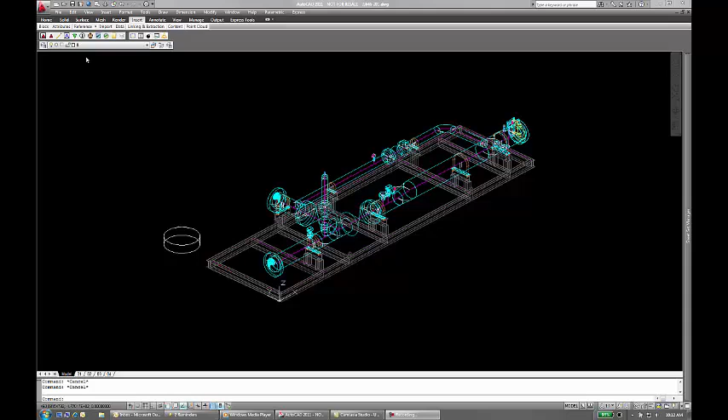So the pencil right here lets me pull up Mini Edge. It's asking me to select a piece of something, a beam in this case. I can go back and run it again and select pipe. So any CADWorx object, it pulls up the Edge Edit dialog.

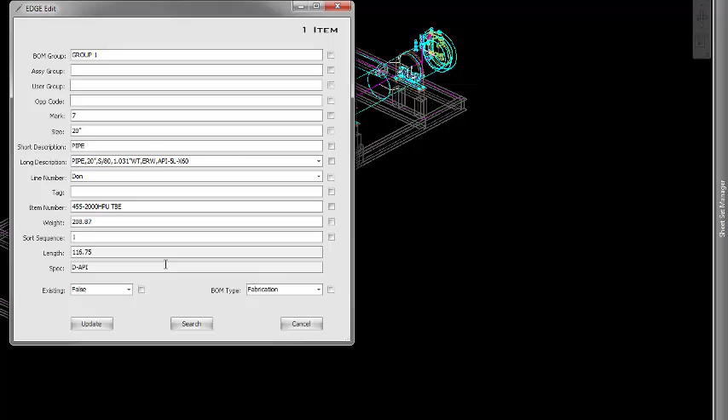So from here, you can make changes and update that part on a case-by-case basis. You can only edit one item at a time right now.

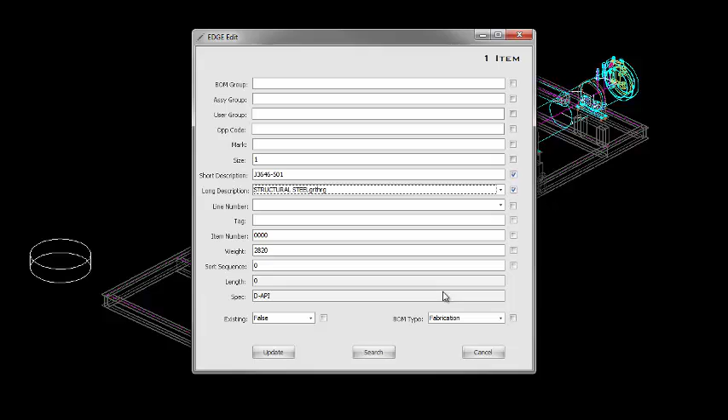But if I wanted to, I could go in and change this to something else. So update, one item updated. If I go back and select that item again, there's the change.

So as soon as I start typing in a field, notice it checks the box. So if I have a box checked, that field and only that field will be updated. You can edit not only steel objects but pipe objects as well.

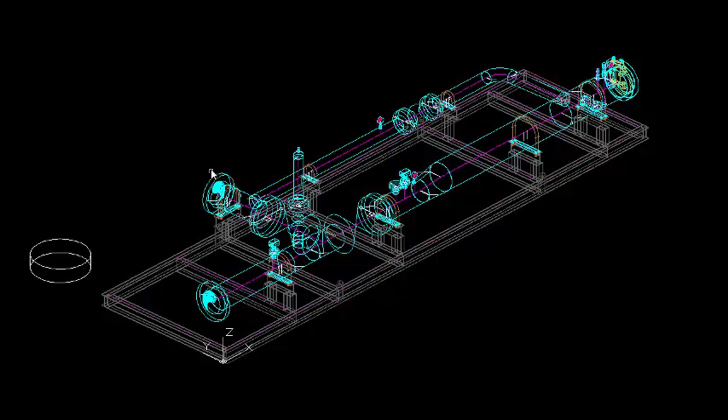Now another thing you can do from here is I can search. So this has an image part number in here for a flange, 16-inch, 600-pound raised-face weld neck flange. So if I click search, it pulls up the Edge search form. So flange, 16-inch, 600-pound, put 60, and raised-face weld neck, and search.

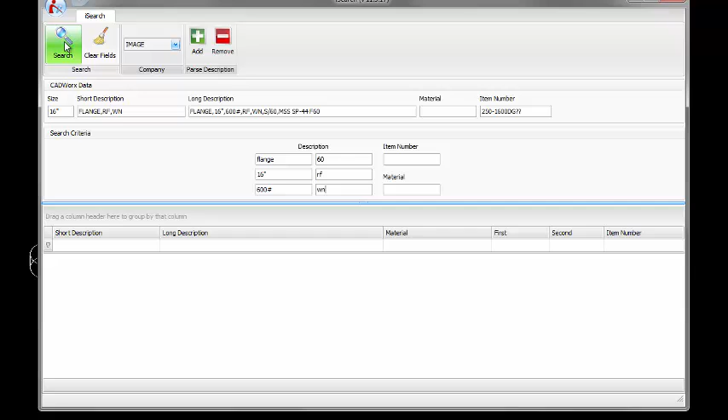This is a special material that wasn't listed. That's why it had 3 question marks in the description right here. But let's say we just wanted to use a standard SA105 flange. I can click that, double click, and it inserts.

You'll see it's updated the item number and it's checked it. It's also updated a short description and long description. I'm not sure why it didn't check that, but maybe a bug. We'll have to check on that.

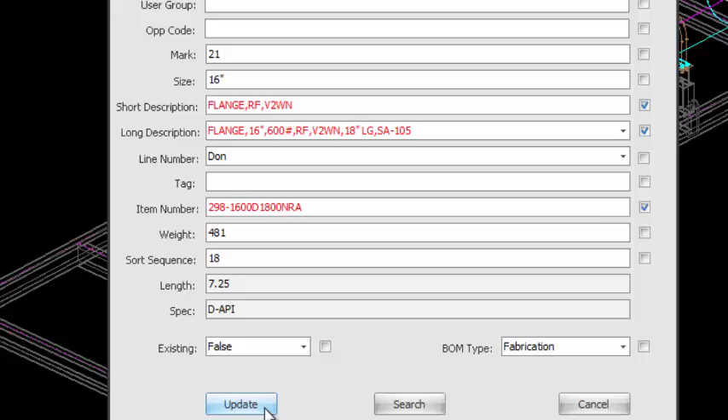Alright, so then I hit update. One item updated. So now if I go and run Mini Edge on that item again, you can see the changes are in there.

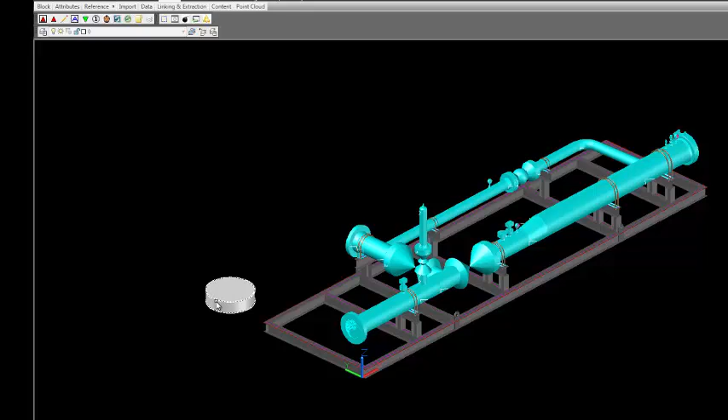One last thing, I've drawn in a shape here. This is a solid. If I go and select that solid, it says it's basically letting me generic attach to this item.

So I can notice that that was not a CADWorx entity. So if I want to, I can go ahead and generic attach to it. The center of gravity, if I want, I can use the geometric center of gravity. So it's going to look at the properties of this, find the geometric center of gravity of this item, and it's going to place the CG of this component at that point.

If I wanted to, I could say let me choose, and I could literally go and select a node or something. You need something probably to click on. But in most cases, probably use geometric center is what you want to do.

By default, it's going to go to put it on a spec called GNR for generic. If I wanted to, I could also select any of the specs that are set up for this job in the spec folder. And lastly, I can select piping, or I can select steel.

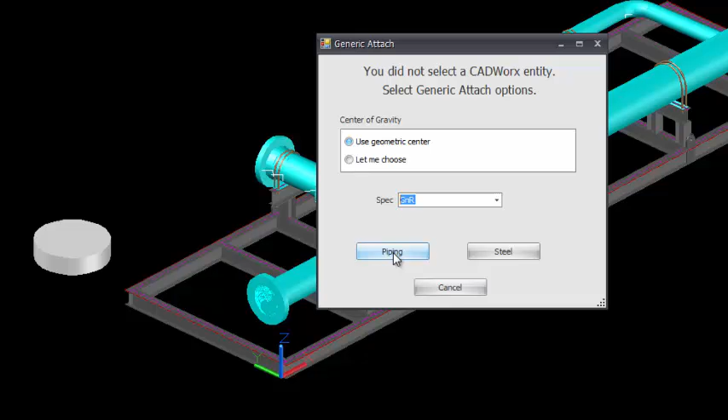If I select piping, it's going to basically put this in as a pipe component. So anything that is going to be unit of measure of each, you'll want to select piping. So at this point, it goes right to the form, and I can type information in.

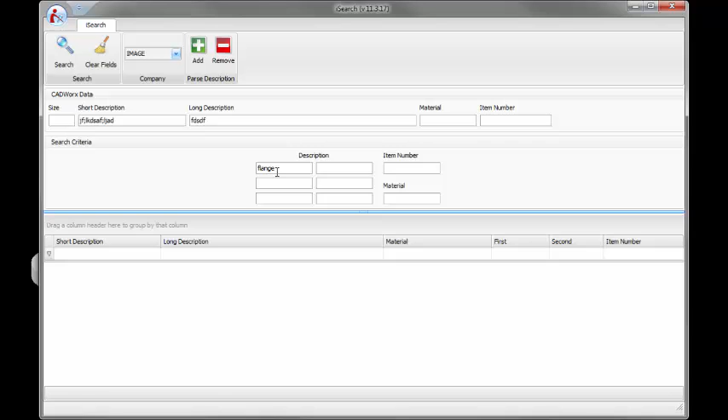Or at this point I could go and do a search, and let's just pick a flange just for the heck of it. Alright, so I'm going to call that a 1-inch flange. All of that data should be checked. Again, I'm going to have to look at that.

But now if I hit update, as far as CADWorx is concerned and as far as Edge is concerned, that object that we just drew in is now a CADWorx plant object with the description and part number that I searched for and inserted.

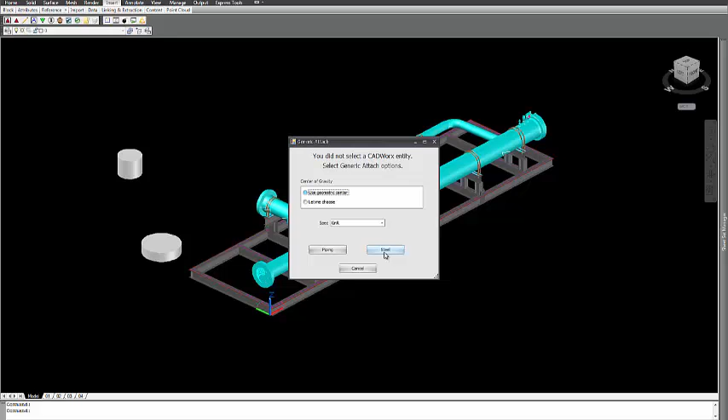Let's do that one more time, and in this case I'm going to do a search, and I'm going to use the geometric center again, and I'm going to pick steel, and in this case I'm not going to mess with anything, I'm just going to hit update.

But if I run edge, regular edge on it, not mini edge, you'll notice that I've got two items. I've got tagged only select, there we go. So I've got two items.

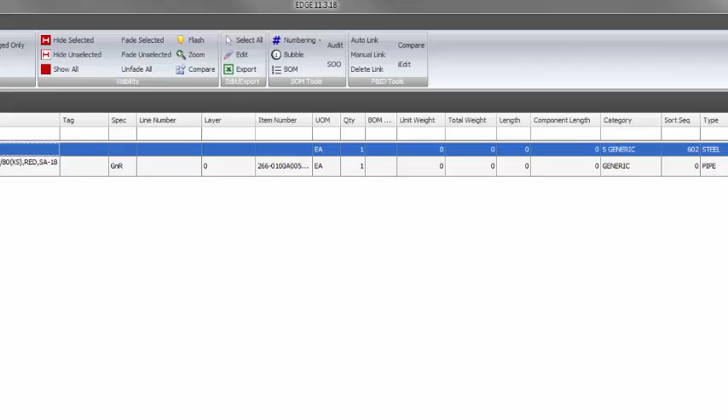One item is an S generic, which is steel, and one item is generic. So that lets me attach the information in either of those forms. Okay, thank you. Any questions?